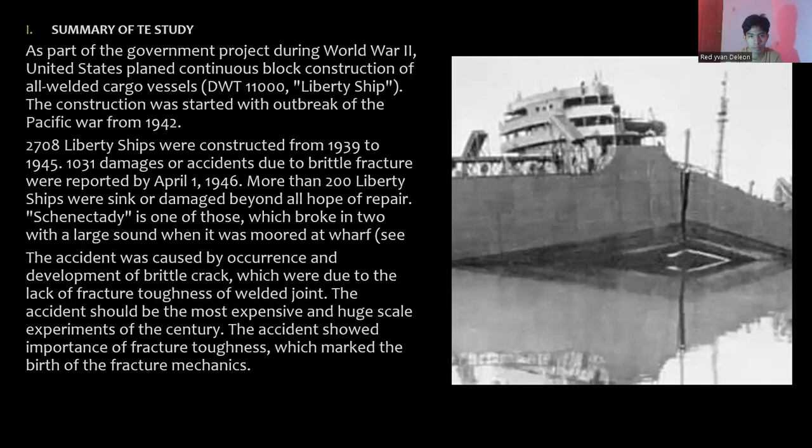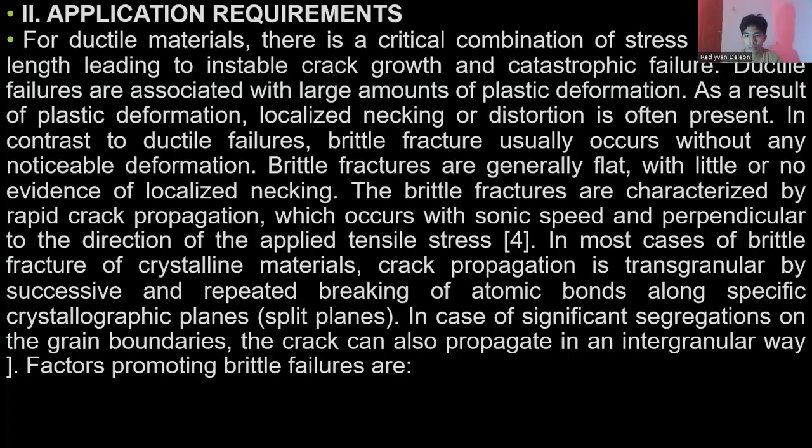High yield strength that allows storage of a high elastic energy level, low temperature that causes a ductile to brittle transition in BCC metals, large grain size that builds up stress from dislocation pile-ups, high strain rates that do not allow time for stress redistribution, coarse carbides or other inclusions that are themselves susceptible to cracking, notches that create constraint at the crack tip, thick sections and plane strain loading.

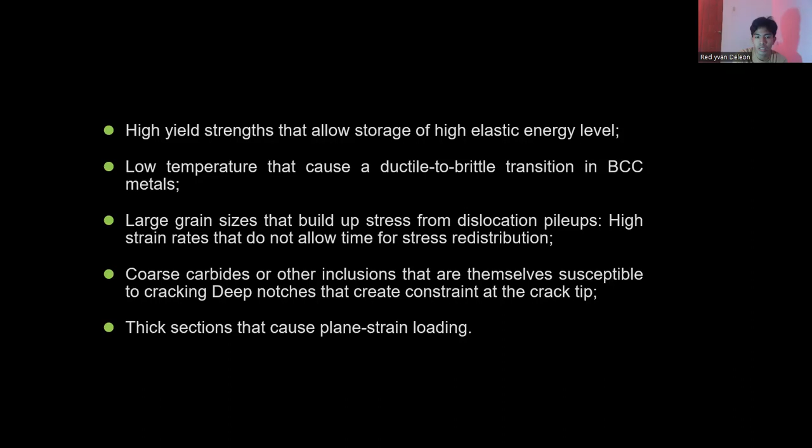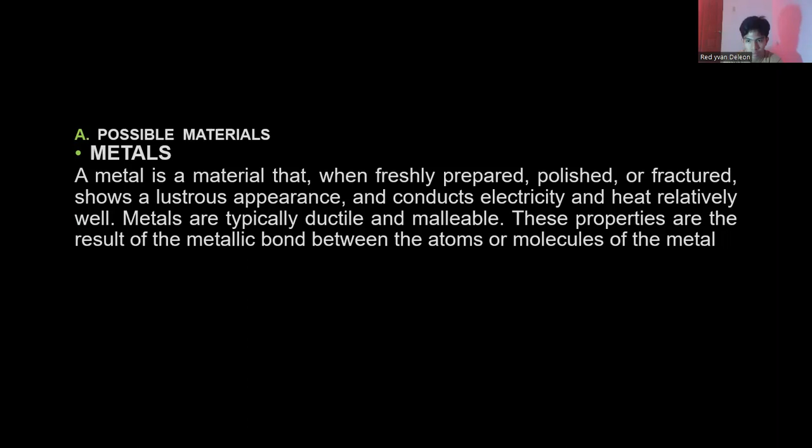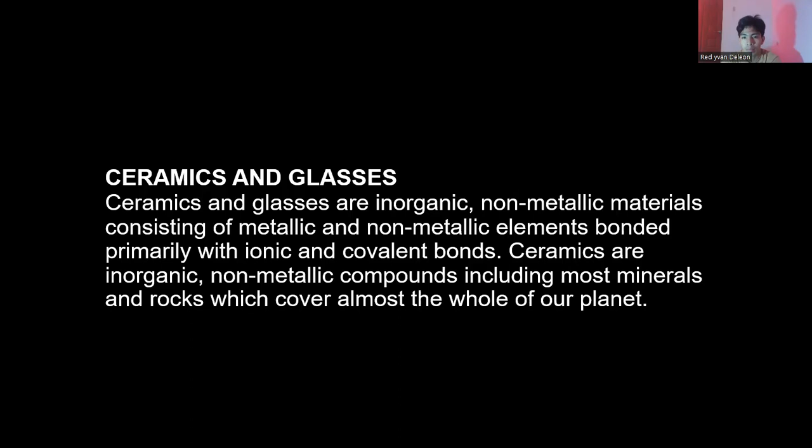Possible materials: metals. A metal is a material that when freshly prepared, polished, or fractured shows a lustrous appearance and conducts electricity and heat relatively well. Ceramics and glasses. Ceramics and glasses are inorganic non-metallic materials consisting of metallic and non-metallic elements bonded primarily with ionic and covalent bonds.

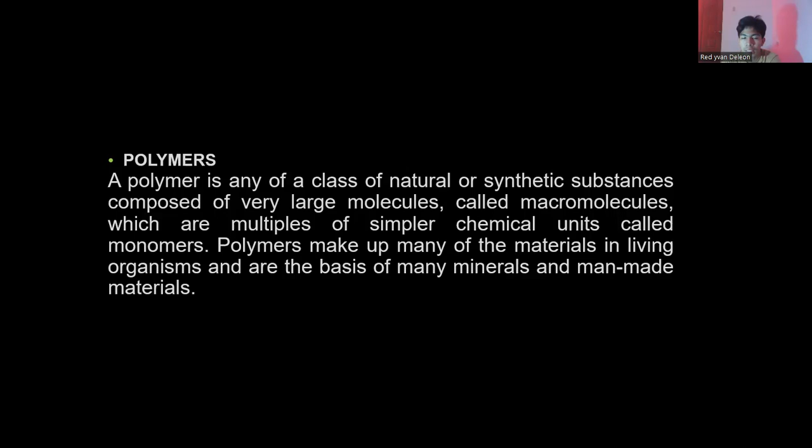Polymer. A polymer is any of a class of natural and synthetic substances composed of very large molecules called macromolecules, which are multiples of simpler chemical units called monomers.

Case study. Although most Liberty ships sunk by means of war, a significant number of them failed with a sudden fracture that raised questions. To discuss the reason for this failure, the representative fates of two different ships will be discussed. Number one is the John P. Gaines. The John P. Gaines was assembled at the Oregon Shipbuilding Corporation in Portland in July 1943, on its way from Dutch Harbor in the Aleutian Islands.

Number 2, the Schenectady. Other than the John P. Gaines, the T2 tanker Schenectady failed after being docked in Portland, only a few days after completing trials, as air and water temperatures were cold. However, the ship was unloaded and in calm water. The fracture extended throughout the deck, the side of the hull, the longitudinal bulkheads, and bottom girders, only hinging on the bottom plate.

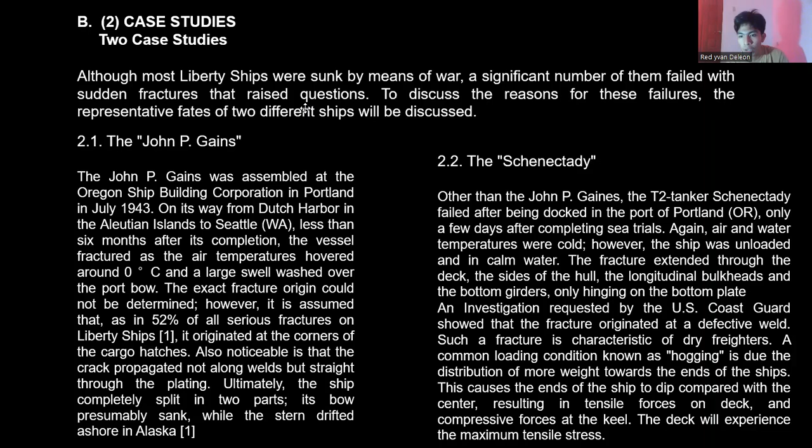Material selection. Fracture mechanics, which have only been developed after the occurrence of serious and unexplainable brittle fractures, allow us to quantify the relationship between material properties, stress level, and the presence of crack-producing flaws and crack-propagating mechanisms.

The strength of a material is a function of forces between atoms. However, the actual material strength is usually at least 10 to 1,000 times below the theoretical value according to Griffith, who predominantly studied amorphous and ceramic materials. This difference between theoretical and observed fracture strength can be explained by the presence of very small microscopic flaws.

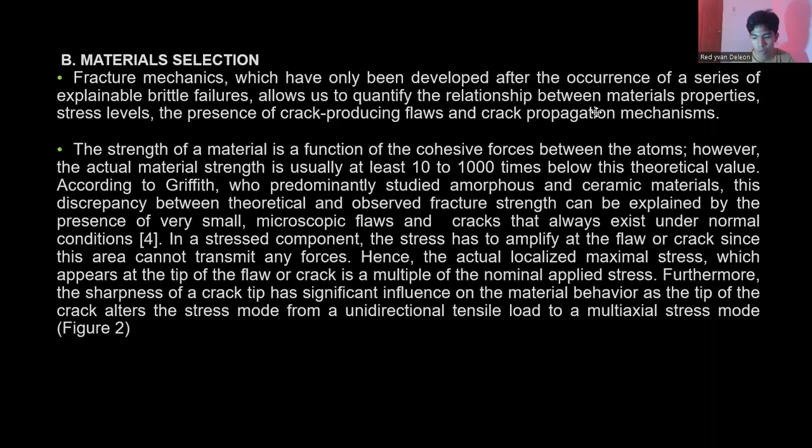In figure 2 is the geometry of surface and internal cracks. Therefore, these flaws and cracks are sometimes called stress raisers. The ratio of maximal stress divided by the nominal applied tensile stress is called the concentration factor. Concentration is deemed one of the major factors influencing fracture resistance in materials and complex structures.

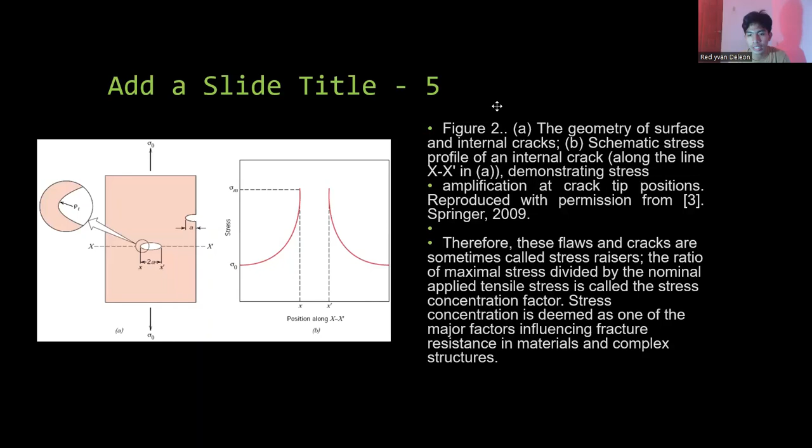Impact fracture testing. For this reason, slow strain rate tests such as tension or torsion tests at room temperature are not sufficient to investigate the mechanical properties of materials. The discovery of this connection resulted in the development of additional testing techniques such as Charpy impact. Ito yung Charpy impact yung nasa figure 3, please.

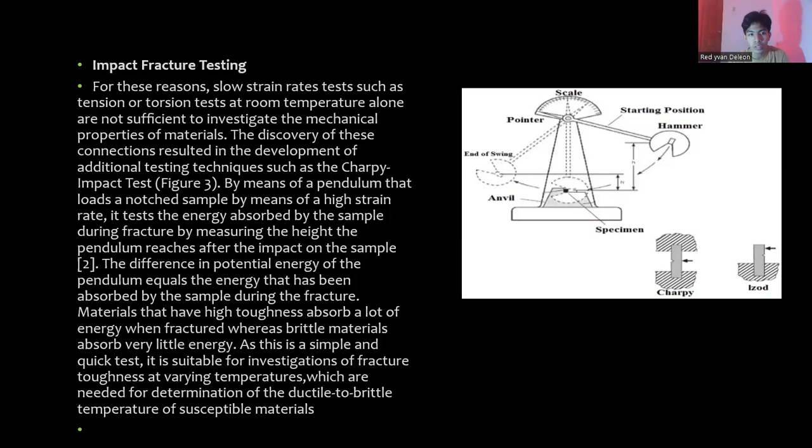Explanation of failure. Knowing fracture mechanics, the failure of the John P. Gaines can be traced to brittle fracture for three main reasons. Many studies indicate that steel quality was a primary factor contributing to the brittle fracture in the structure. Due to the general steel shortage of that time, high quality steel was barely available during World War II. Consequently, the mild steel utilized for the Liberty ships did not comply with the modern impact absorption standard.

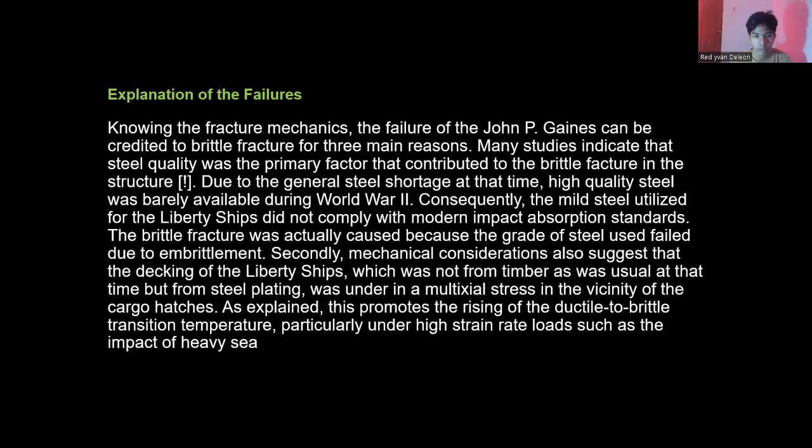The Schenectady also failed in a brittle manner, given the poor steel quality, which brittle behavior in cold condition is one of the reasons for the failure. Some references also quote hydrogen embrittlement due to poor welding as another reason for the failure. Hydrogen embrittlement is mostly caused by electrode welding in wet or damp conditions. The steel utilized for the Liberty ship can be known as acceptable for riveted ships. However, a propagating crack in a riveted construction will be stopped at the latest once it arrives at the joint between two plates, since these two plates are laying over one another.

Conclusion and future prospects. Today, more than 60 years later, it's hard to give a suggestion. It's apparent that a steel with higher fracture toughness at low temperature should have prevented many ships from failing. It's also obvious that more experienced and better educated welders should have produced welds without, or at least with fewer and smaller, flaws. Today it is commonly understood that rectangular corners have to be avoided in order to prevent stress concentration.

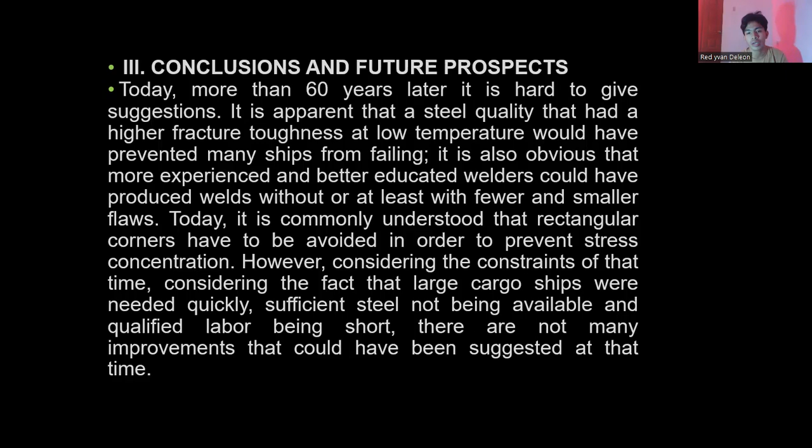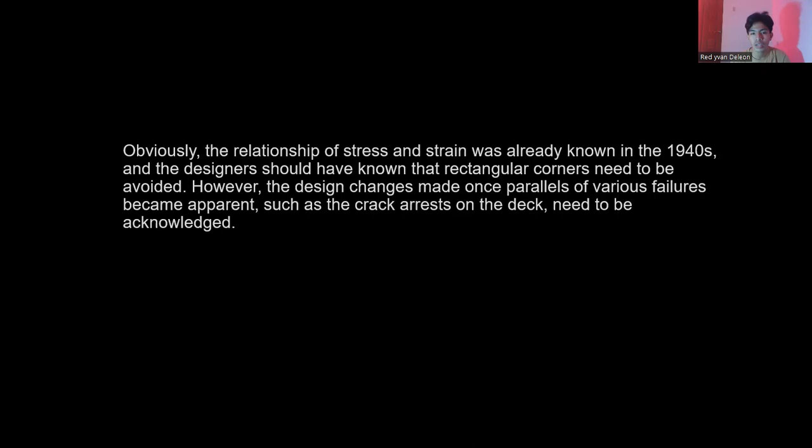However, considering the constraints of the time, the fact that large cargo ships were needed quickly, steel not being available, and qualified labor being short, there are not many improvements that could have been suggested at the time. Obviously, the relationship of stress and strain was already known in the 1940s, and designers should have known that rectangular corners need to be avoided. However, the design changes made once various failures became apparent, such as the crack arrestors in the deck, need to be acknowledged.

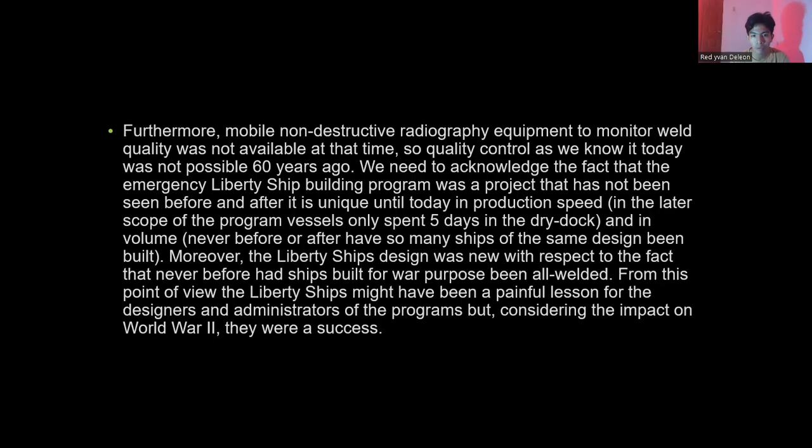Further, mobile non-destructive radiography equipment to monitor weld quality was not available at that time. So quality control as we know it today was not possible 60 years ago. We need to acknowledge the fact that the emergency Liberty Shipbuilding program was a project that had not been seen before and is still unique today in production speed. In the later scope of the program, vessels only spent 5 days in dry dock, and in its volume, never before or after have so many ships of the same design been built.

Today, ships and the like are designed to yield before fracture. The knowledge behind this approach, however, was only developed in the 1960s. Without a doubt, it can be claimed that the failure of the Liberty ships caused significant progress in fracture mechanics. This highlighted the influence of temperature on material toughness and hence the need to specify toughness requirements for welded ships.